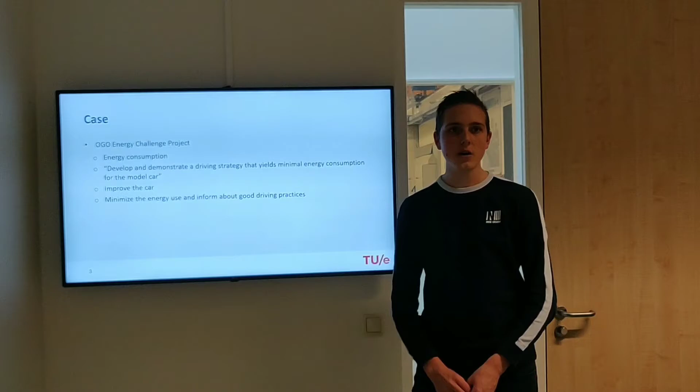So the aim of the project is to develop and demonstrate a driving strategy that yields minimal energy consumption for the model car. We hope that the results of our study will provide data which the CTO of EV Vehicles can use to improve the car, and for the conditions in which it will normally be used.

So we try to make the data as realistic as possible, and we hope it will also be able to support the owner of the car to minimize energy consumption and inform them about good driving practices.

The project setup: as it's a huge project, we decided to divide our group into 4 different departments, all consisting of 2 people. This was profitable because every department could specialize on its own task instead of working with the whole group on everything, because then we would get a very non-detailed, general study.

Also, because of the departments, faster communication is possible, and also faster decision making, as otherwise you have to discuss everything with the whole group. Now every department can discuss the problems they have between 2 people, and it's just a faster way. You work more efficiently in the decision making.

We also have weekly meetings in which every different department presents the progress they made in that recent week, and also presents what they are going to do in the next week.

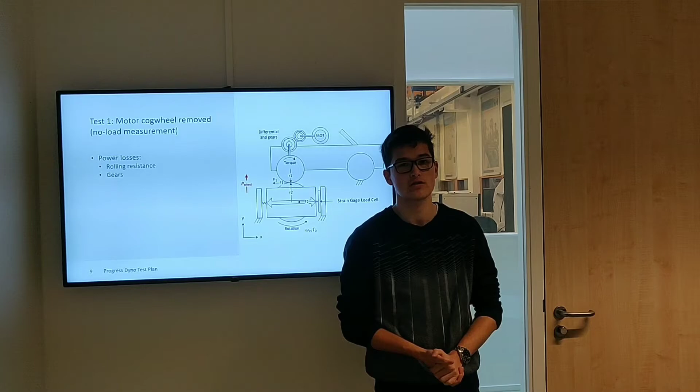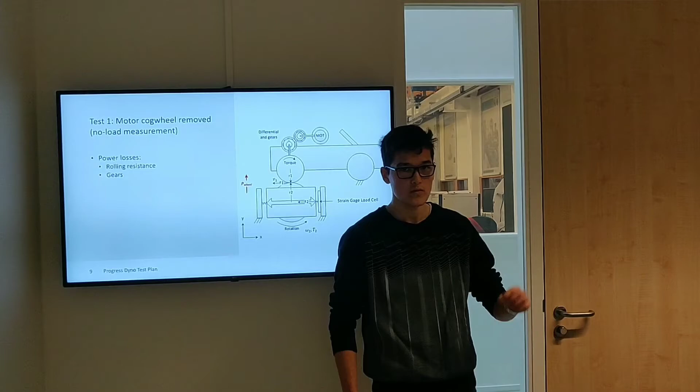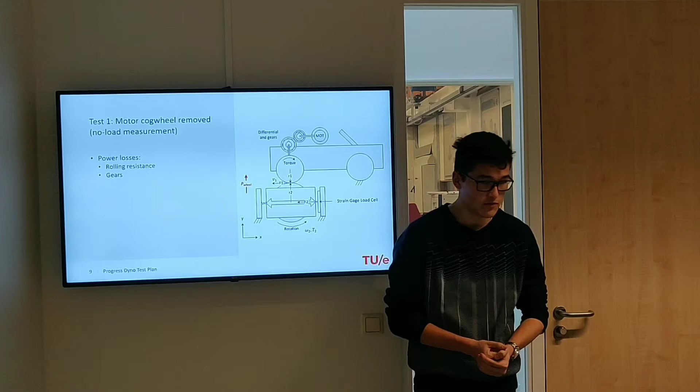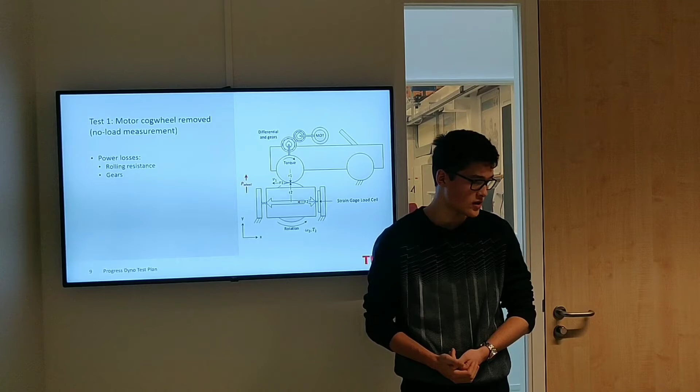The vehicle is placed with the rear wheels on the dynamometer. We have a roller attached or connected to them, or they have surface contact. With the MATLAB code, which I will elaborate on further, we can control the forces and the velocity, and thus we can input some power with the rollers. Since the power only gets divided by the rolling resistance and gears, we can determine the rolling resistance and gears power losses with this test.

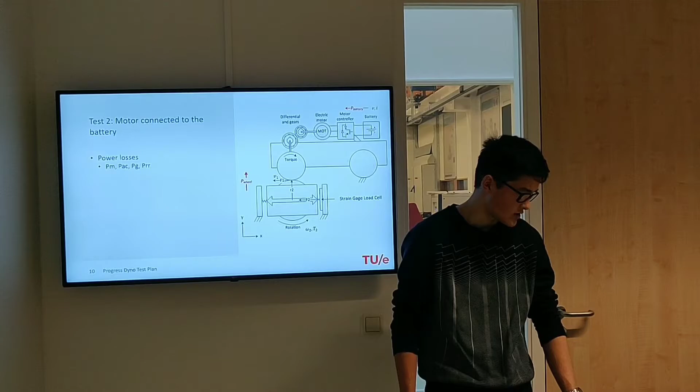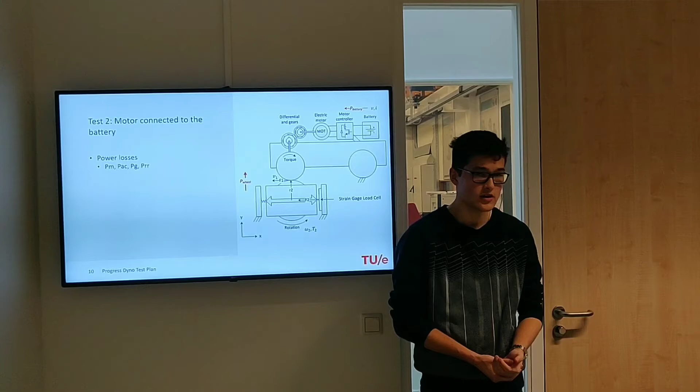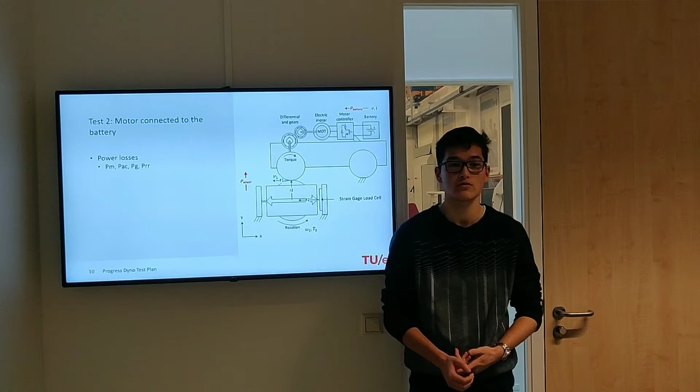The second one, we will connect the motor, and now all the power losses are visible, or the whole powertrain is rolling. So we have the motor that has some power losses because it's not 100% efficient. We have the auxiliary losses, for example the fan in the car. We also have the gears and of course the rolling resistance, all taking part in this experiment.

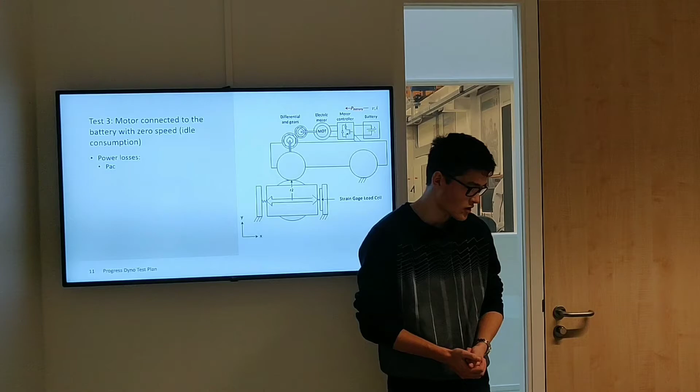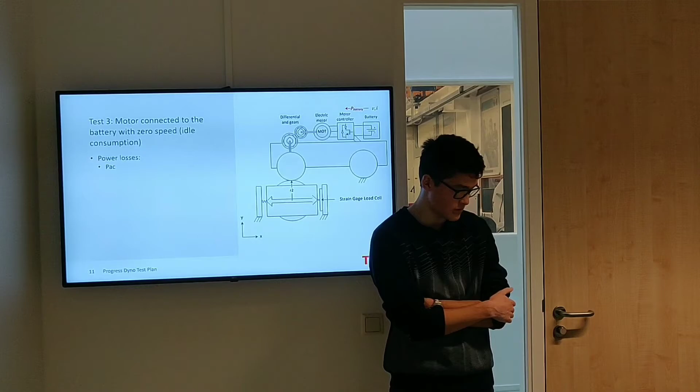The last one is also with the motor, but now we have 0 speed. This means the gears aren't running, so the only power losses in this experiment are the auxiliary losses. We can determine these instantly from the results of the power from the battery.

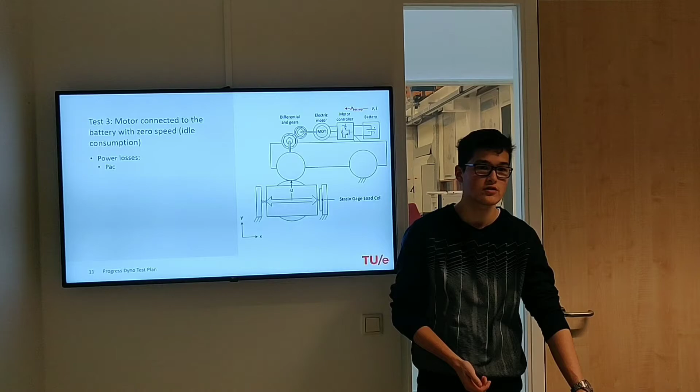If we do all these 3 tests, we can derive all the power losses, and we know the power of the battery. When we subtract these power losses, we can know how much power is delivered to the wheels.

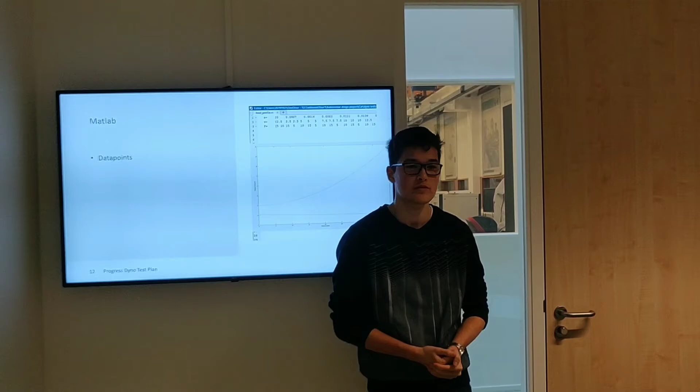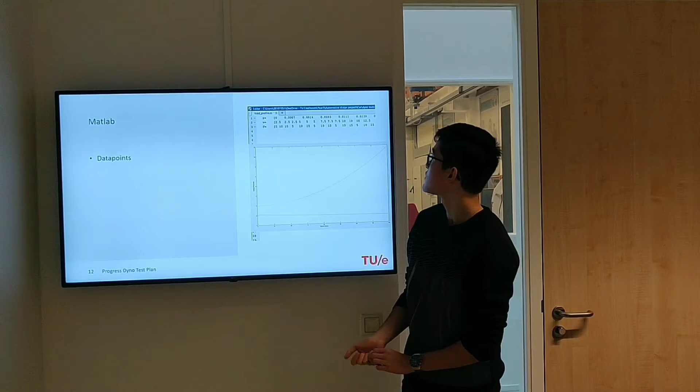So how we do this is we completed a program, which my teammate Teun did. You can see here the distance traveled, the velocity, and the forces exerted on the roller. At first there is 0 distance, and it will go to 2.5 meters per second, and then 5 Newton is exerted, and this will continue until we reach the next distance.

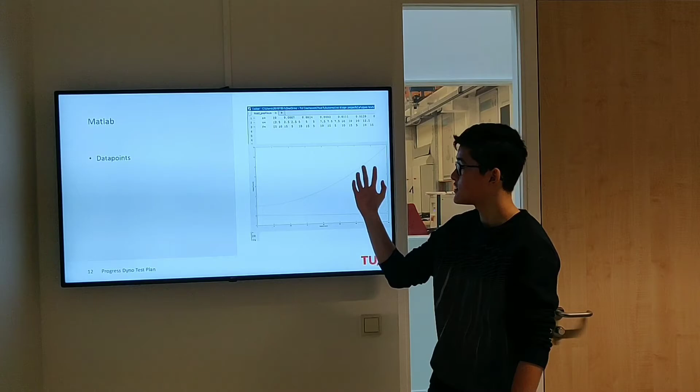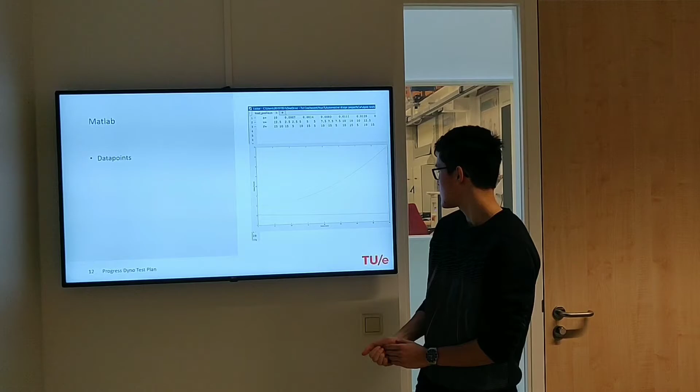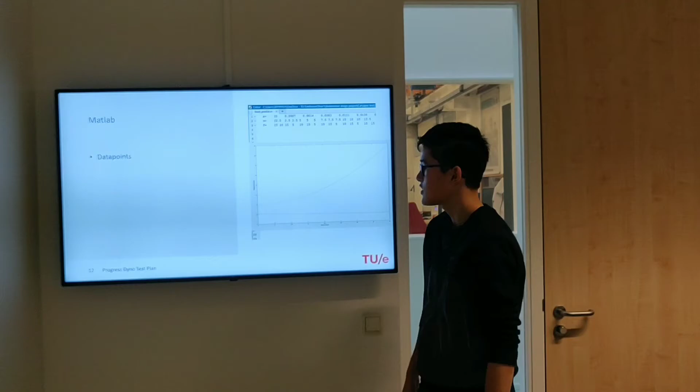After this we have a lot of data points which we can interpolate if you want all the specific lines. Another person on our team who helped us was Thomas. He made an estimate about the values for how it should be. So here you have a line of the rolling resistance, which is going down a little bit, and here you have the line of the air drag. This is a nice estimate of how it's going to be and how it should be.

The teamwork I had with Teun was great. We had a good distribution of work, and we were always working on something. Teun did the MATLAB things, and I worked on the 3 experiments, and together we formulated a test plan. This went well, and although our test plan did not get approved, this was not a big issue because the main errors were minor and we could fix them easily. I think we did a good job.

For our future agenda, I'm still going to work with the same team, with Teun. Up until now we were on schedule and finished everything on the test plan. Now, since we're still in week 3 with a lot of weeks left, Teun and I are going to work on the driving strategy once we have all the experiments done and can make a good estimate. After that we can help others and formulate the final report together.

Now Bas is going to tell us something about the other 2 experiments.

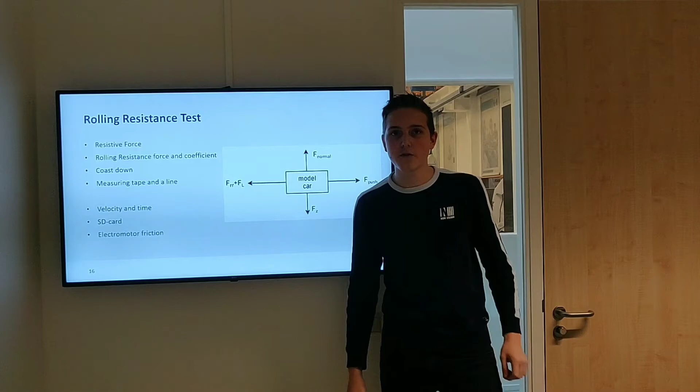So then we'll move on to the rolling resistance test. The rolling resistance force is a resistive force acting on the car, caused by the friction between the tires of the model car and the road surface. The aim of the experiment is to find the rolling resistance force and its coefficient.

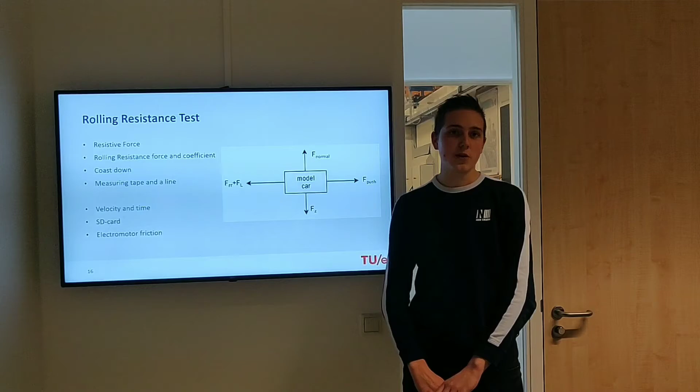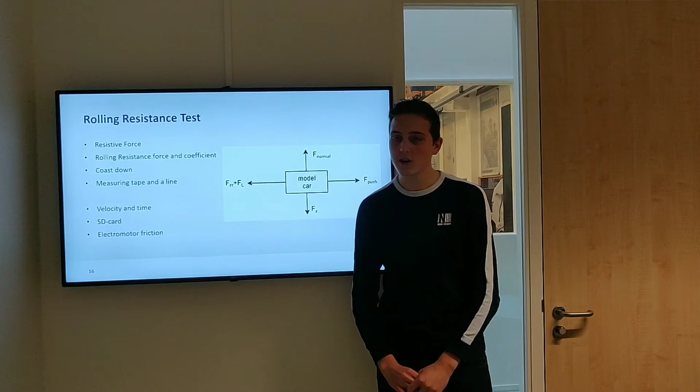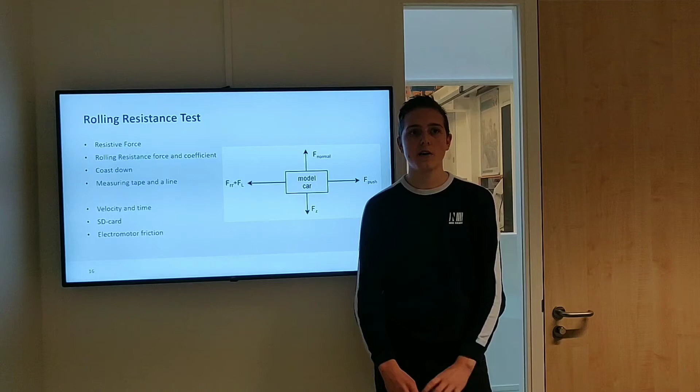The model car will be pushed in a forward direction on a surface with a slope of 0, and we'll let the car coast down until it stops. We'll put measuring tape on the ground so we can see the distance it takes for the car to slow down and come to a stop, and we'll also put a line on the ground from where we release the car after pushing it. The variables measured are velocity and time, stored on an SD card.

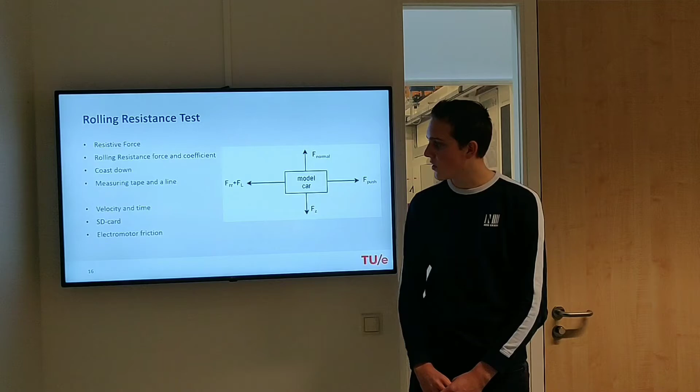The experiment will be performed with the electromotor friction taken into account and without. For the first test we will take it into account, and then a cogwheel on the electromotor will be removed so the electromotor friction won't be taken into account. From this we can also determine the electromotor friction in addition.

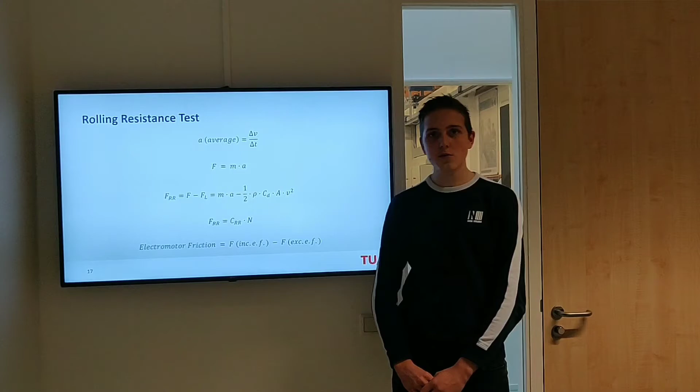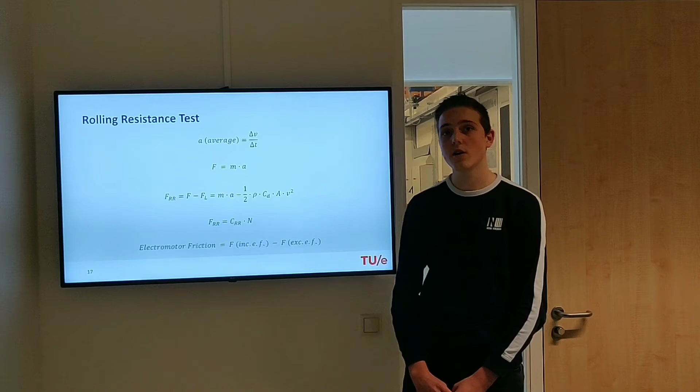Then how will we calculate the rolling resistance? From the obtained results, the velocity and time, we can calculate the average acceleration. With the average acceleration, we can use the formula F equals m times a, using the acceleration and mass of the car to calculate the total force that the car needs to overcome. However, because the rolling resistance force is a resistive force, it will have a minus sign as it's working against the car.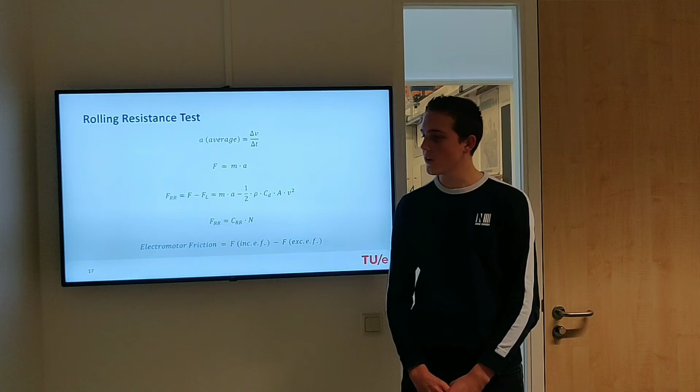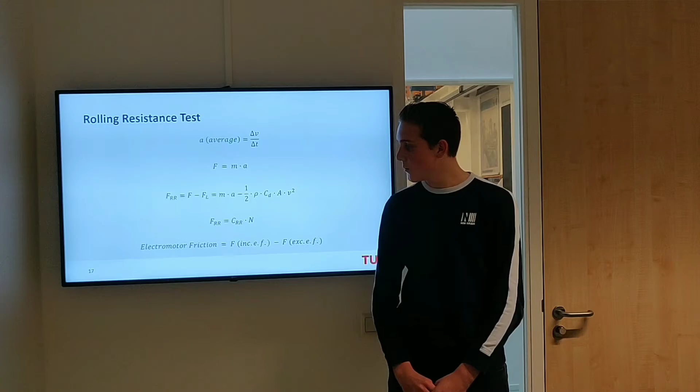The aerodynamic drag force also has an influence on the car during the rolling resistance test, so you have to subtract this from the total force and you'll get the rolling resistance force. Then, having the rolling resistance force, the rolling resistance coefficient can be calculated using the formula that the rolling resistance force equals the rolling resistance coefficient times the normal force.

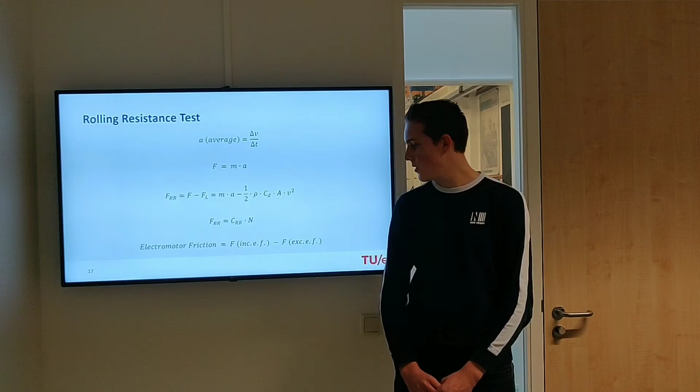As the rolling resistance force has a negative sign, you would say that the rolling resistance coefficient will also be negative. However, this is not the case. We can also calculate the electromotor friction by subtracting the total force excluding the cogwheel from the total force including the cogwheel.

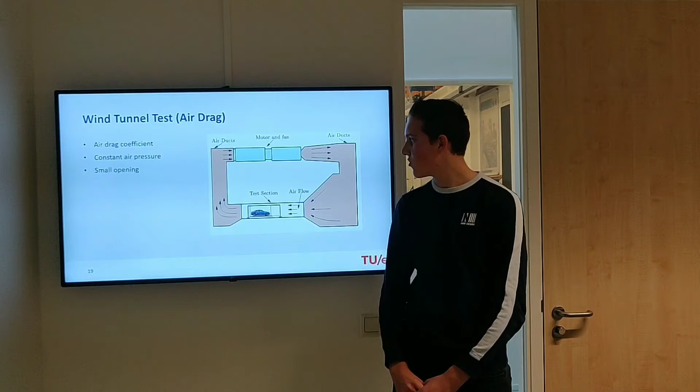Then something about the wind tunnel test for the air drag. The aim of the wind tunnel test is to determine the air drag coefficient belonging to the model car. The air circulates through ducts of different sizes and shapes, and the total air pressure along the duct decreases in the inflow direction. The motor and fan are there to compensate for this loss of pressure and to maintain a constant air pressure at the beginning of each cycle.

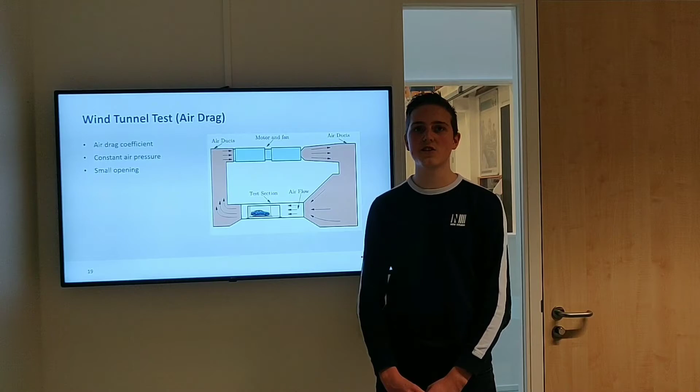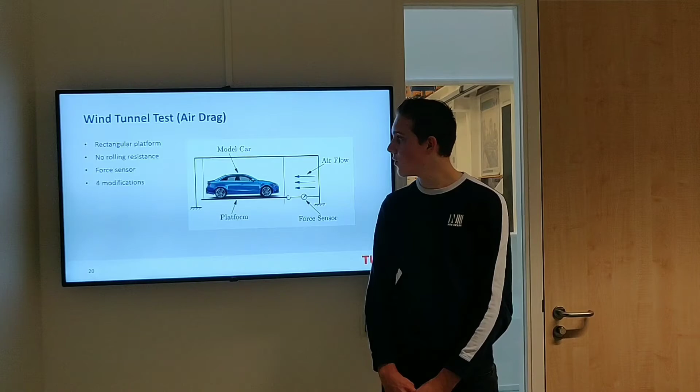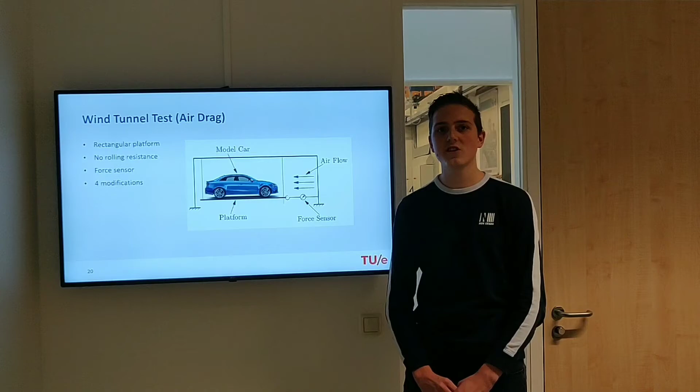There's also an opening in the wind tunnel, so the static pressure within the wind tunnel is the same as the air pressure outside it. In the test section, the car is placed on a rectangular platform with a force sensor attached on the front side. It hangs above the surface, so it doesn't have rolling resistance. When the airflow moves the platform, the force on the force sensor will increase.

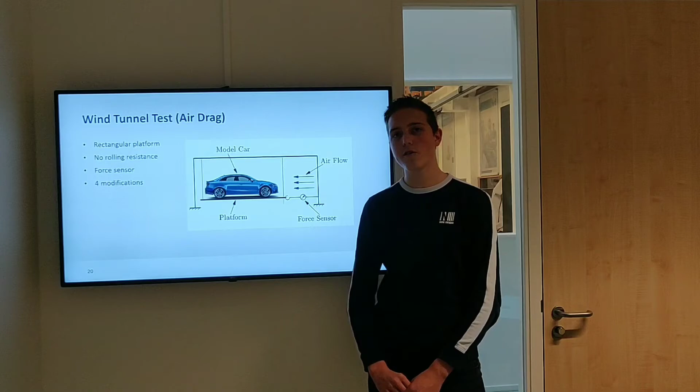The airspeed of the wind tunnel can be adjusted, and the difference in air pressure will also be measured by the wind tunnel. The test will be performed using different modifications of the car, sometimes with or without splitter and sometimes with or without spoiler. For all 4 possible modifications, the test will be performed at 4 different speeds.

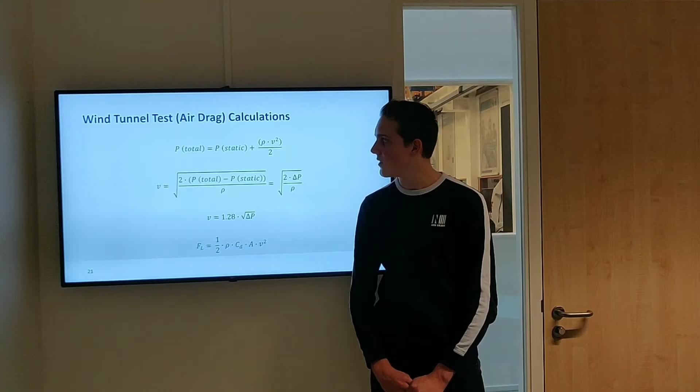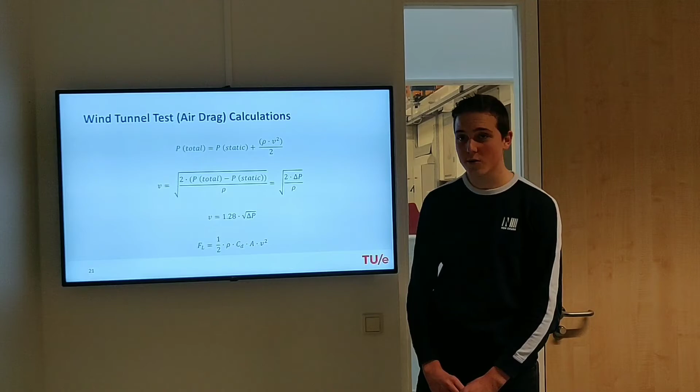And how will we calculate the air drag coefficient? Well, from the equation of Bernoulli, the total air pressure is the static air pressure plus rho times v squared, the air density times v squared divided by 2. From this, we can derive that the airspeed is the square root of 2 times the difference in air pressure, which will be measured by the wind tunnel, divided by the air density.

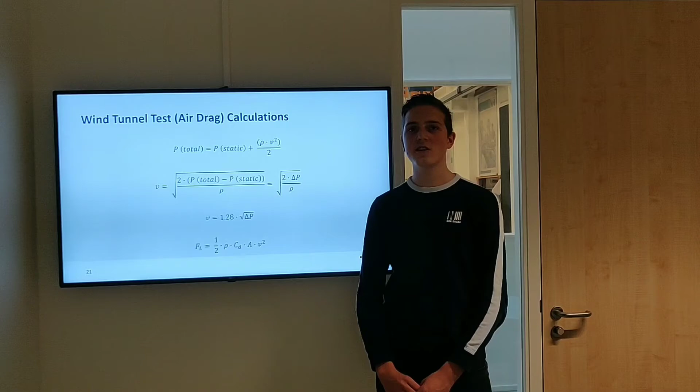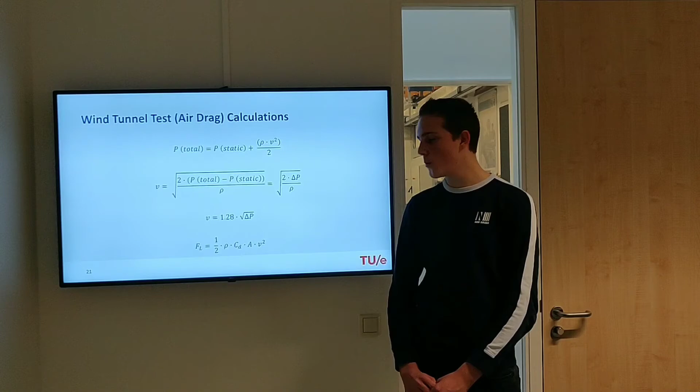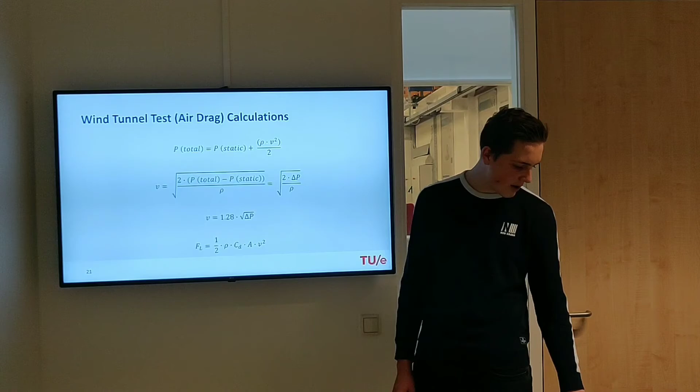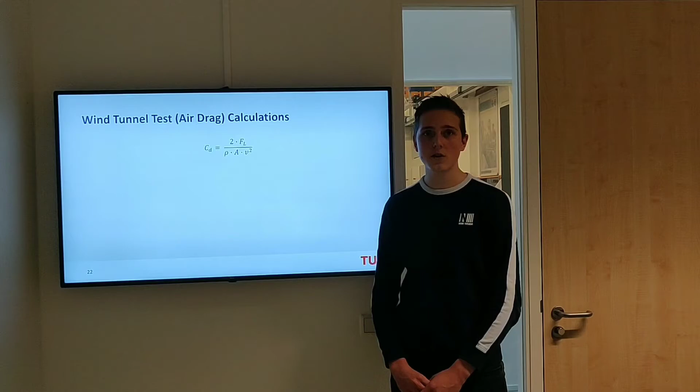In this case, we can assume that the velocity is 1.28 times the square root of the difference in air pressure. Then the formula of the air drag force, which you can see the air drag coefficient is in it, and from that equation we can derive the equation for the air drag coefficient, which gives us that the air drag coefficient is 2 times the air drag force, which will be measured by the wind tunnel, divided by the air density times the frontal area of the model car times the velocity squared.

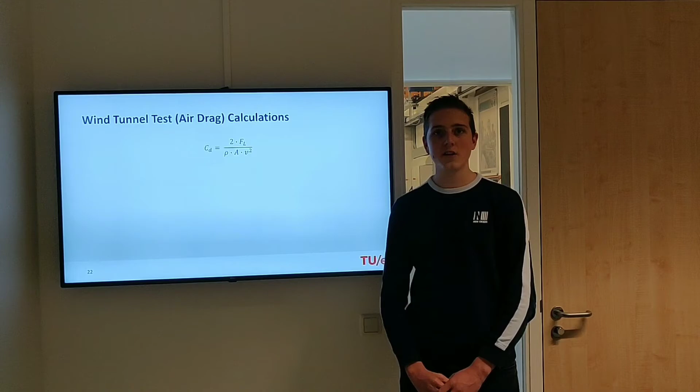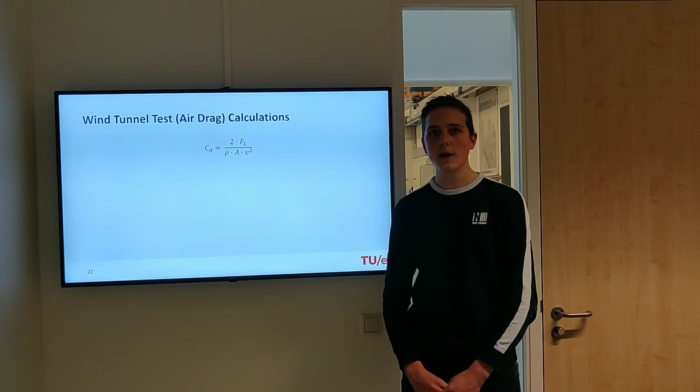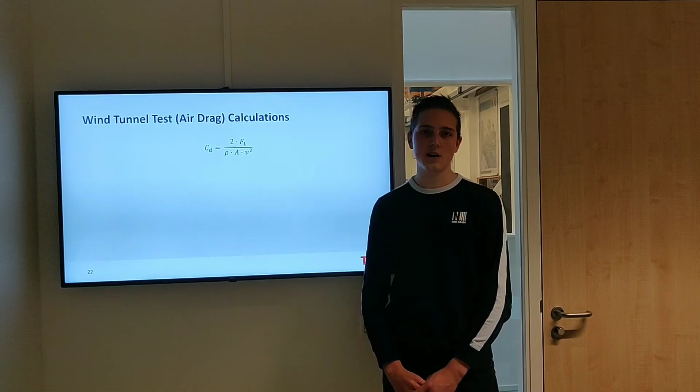Just a quick reflection, the teamwork went great until now. I'm working with Bart-Jan, and we finished everything on time, and now we handed in our second iteration for the test plans, and we think they'll both be accepted. Next week we're going to perform the tests, and when the tests have been performed, test reports will be written, and we'll also try to come up with an optimal driving strategy for the driver, and at last the final report will be written as well.

So then we move on to a part about the communication systems in the model car, presented by Zhengyang Lu.

Hi, I'm Zhengyang Lu. I was responsible for the communication system, the toll payment system. So in week 1, I got an understanding of the task, what I have to do, what is expected.

And then I set up Arduino IDE for coding. It was my first time working with Arduino. And then I figured out how the radio and the IR sensor codes work to actually use them for the system.

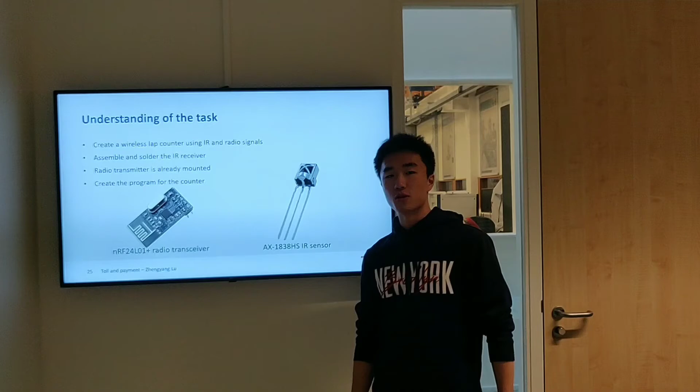So essentially what I had to do is create a wireless lap counter using IR and radio signals. I also had to assemble the IR receiver, and program the radio transceiver because it's already mounted onto the Arduino board. Then I had to create a program that implements these components.

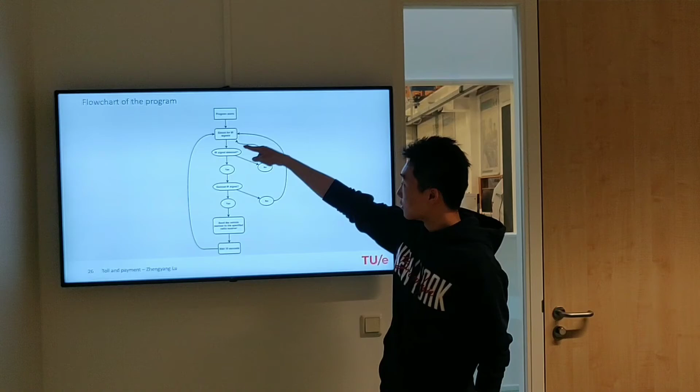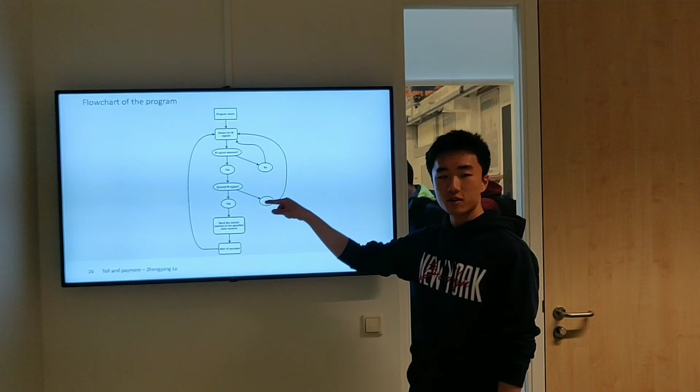So here's the flowchart for the lap counter program. First the program starts, it starts detecting IR signals. When it doesn't detect the IR signal, the loop keeps going. When it does detect an IR signal, it checks if it is the desired one, and the desired IR signal sent by the IR transmitter at the track will be exactly 2 bits long with a value of 1.

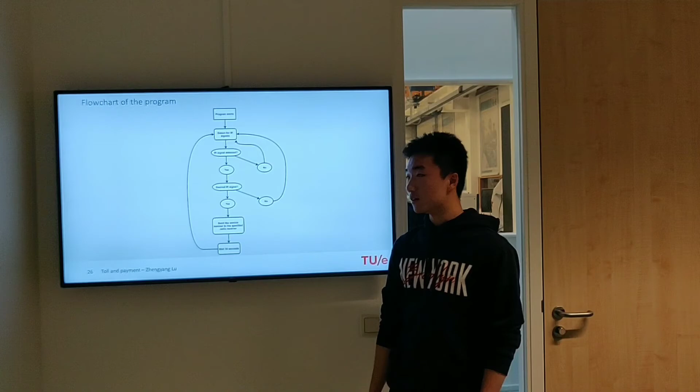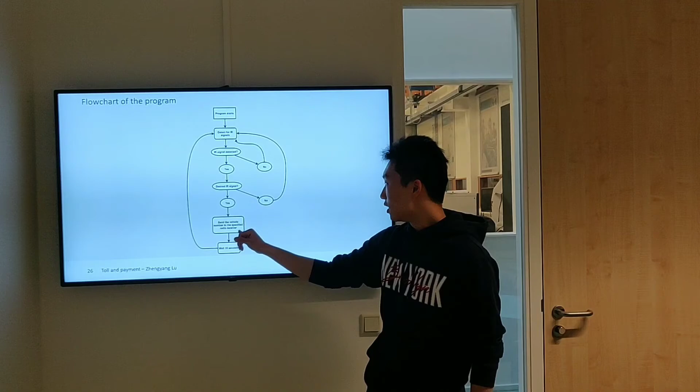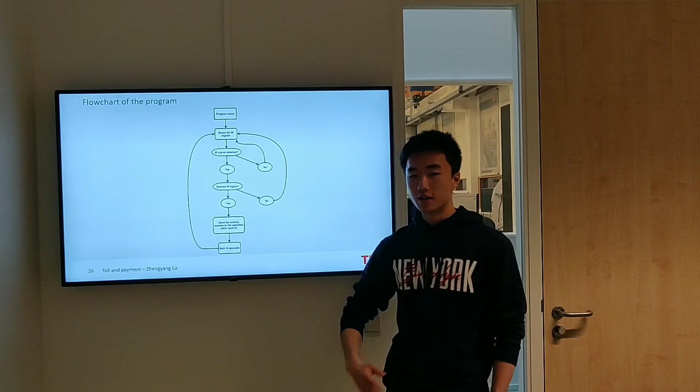If it's not the desired IR signal, it goes back to detecting for IR signals, and this is another loop. If it is the desired IR signal, then it tells the radio transceiver to send the vehicle number to the specified radio receiver at the track. So basically, every time the car crosses the finish line, it sends the car number to the computer.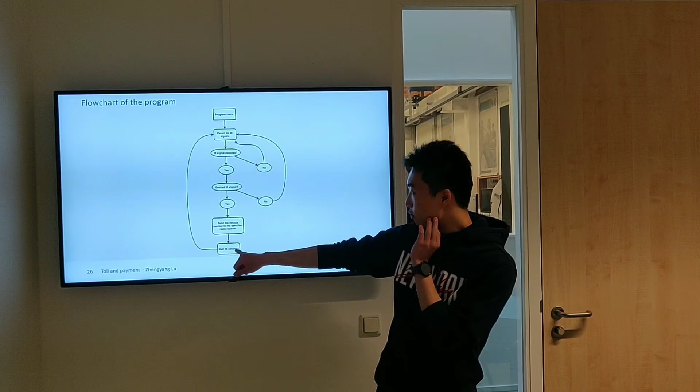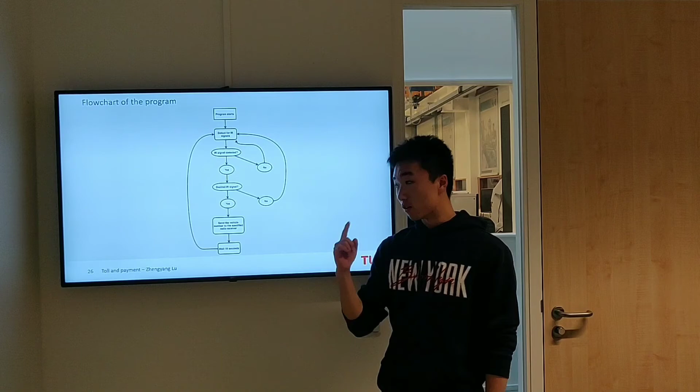So it counts the lap time and number of laps. After this, the program waits 10 seconds before detecting for IR signals again. This is to prevent our car from detecting the IR signal twice while crossing the finish line only once. This could happen if the vehicle is moving a bit slow or other problems. That's the overview of the program.

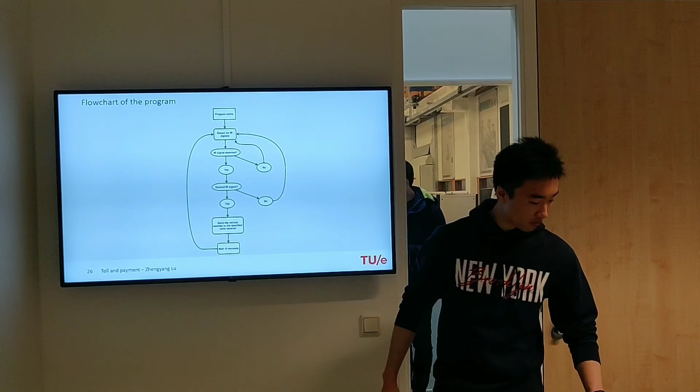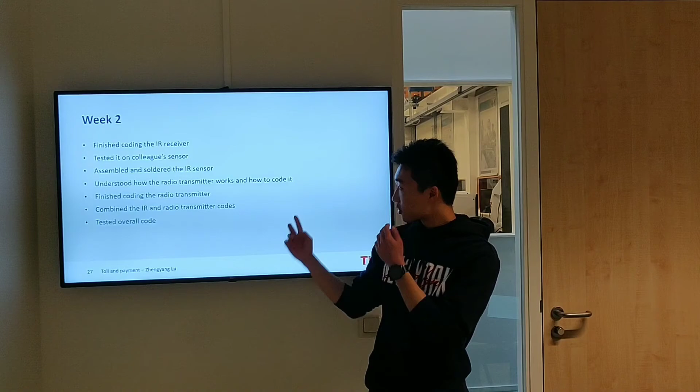So in week 2, I first coded the IR receiver. Since Niels brought his own Arduino board with an IR sensor, which was the exact same model as the one we were supposed to use, I used his IR sensor and played around with the library functions, got an understanding of how it works, finished coding it, and tested on his sensor again to make sure it really works. Then I viewed some tutorials online to figure out how that radio transmitter works, what the library functions are, and how they work.

And then I finished coding that, and we tested the radio transmitter on the actual car at the soldering lab. So we made sure the radio transmitter works, and then the three of us, me, Bart, and Niels, combined both the IR part and the radio transmitter part, and tested it again to make sure it all works in combination.

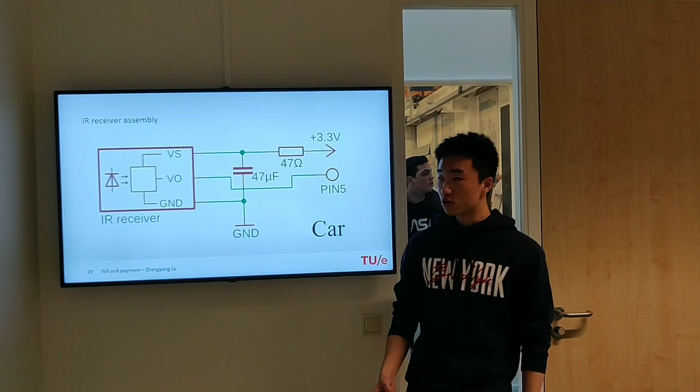Also, as I said before, I had to assemble the IR receiver. This is a generic overview of how the receiver has to be connected. This is just an overview because the actual component has a different pin layout, as you can see here. With some help, I made a scheme with the actual components.

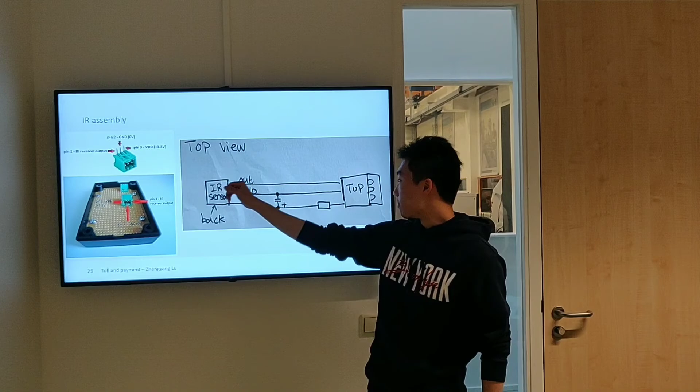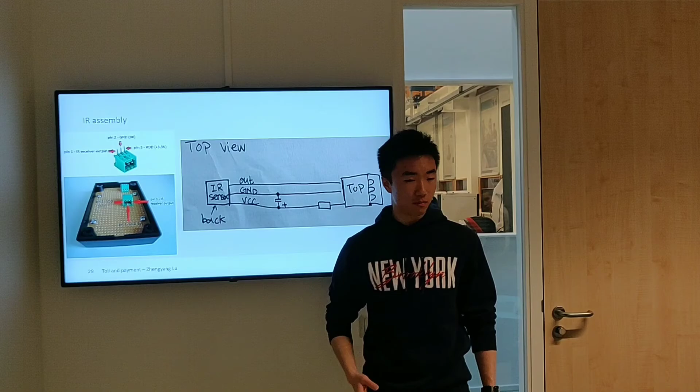These are the 3 pins from the IR sensor, and I have to wire the pins to this component, and a cable from the Arduino box on the car will be connected here, and then I have to solder everything so that it's all stuck in place and would not move.

Some challenges I faced: it took some time to figure out how Arduino coding works, it was my first time doing it. I also don't have much soldering experience, but I managed to overcome it with minor help. Figuring out how the IR receiver is connected also took some time. It was a bit confusing at first, but I managed to overcome it.

Another big problem was the pin layout. We kept writing the wrong pin number in the program, which caused some issues, but in the end we managed to figure out which pins we are supposed to use for which components on the Arduino board.

Overall, I think my progress is quite good. Worked well with my two other colleagues and the rest of the team. I'm quite ahead of schedule because I was able to work in parallel instead of waiting for Niels and Bart to finish their part, and then I programmed my part. So that was very efficient.

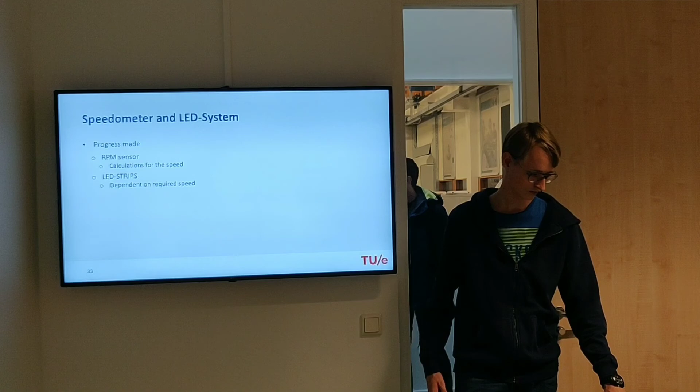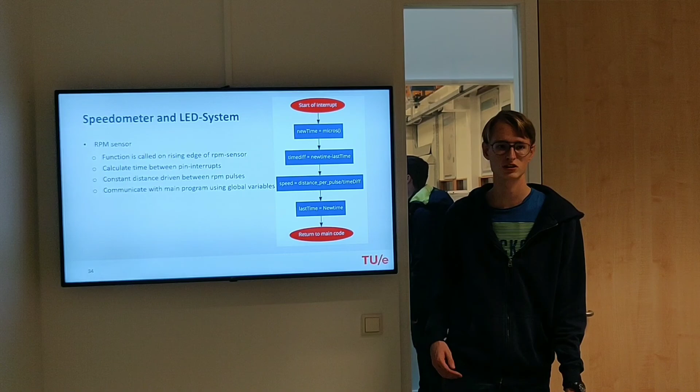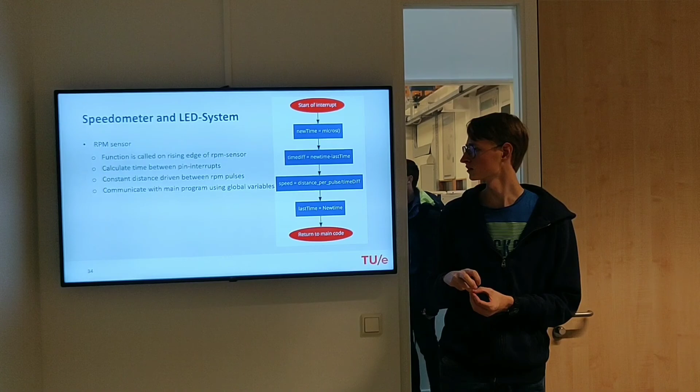For the speedometer system, we made an interrupt function that triggers every time the RPM sensor has a rising pulse, so every time the magnet is near the RPM sensor this function is triggered. We measure the time with the micros function, and then calculate the difference between this interrupt and the one before. By that we can calculate the speed of the vehicle and the distance it traveled, and at the end we store the time as the last time, so for the next iteration it also has the most recent time.

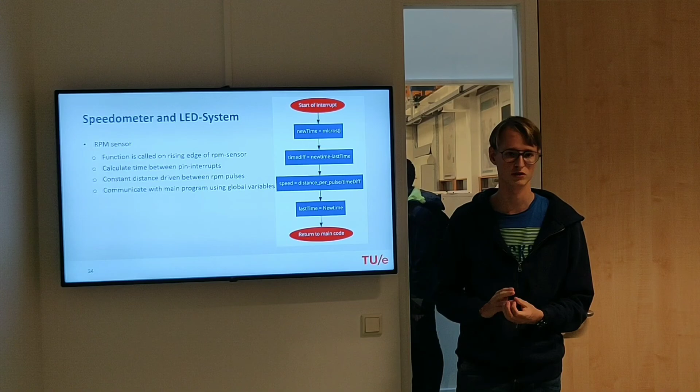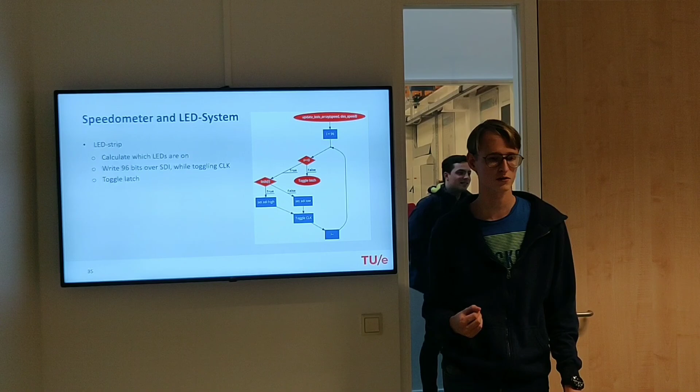Then we have the LED system. Each LED strip is made of 32 RGB LEDs, all connected to shift registers. We have an array with every LED, so we can calculate if the LED should be red, green, or blue for the speeds, and then we write it to the LED strips. Every time we write one bit we toggle the clock, so it's stored in the shift register, and then we toggle the latch, so it updates all the LEDs.

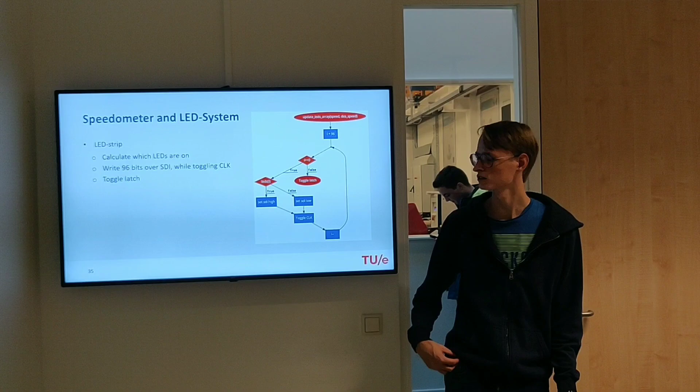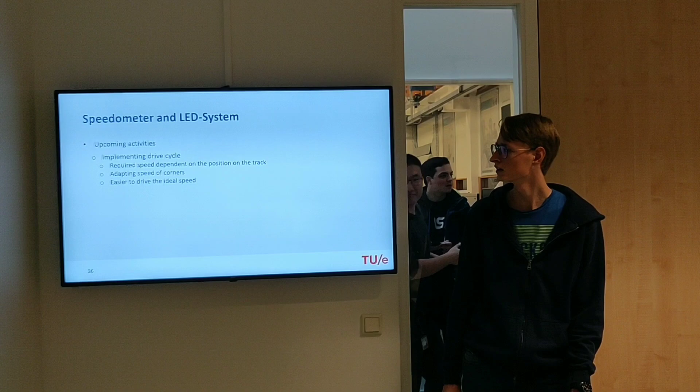Some upcoming activities: we would like to implement the drive cycle we're going to do in the code, so that if we have a corner, for example, we can slow the car down and keep driving the most efficient strategy.